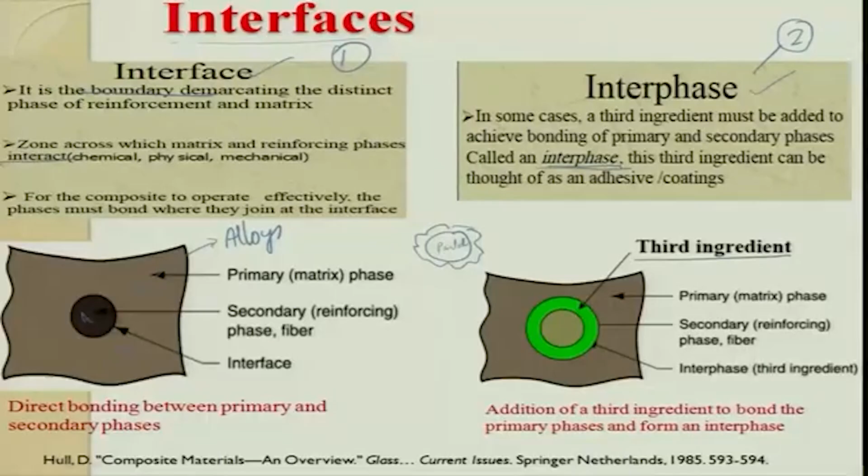The interface bonding can very strongly influence composite strength, modes of failure. I will tell you, if you have a matrix, a reinforcing agent, and if a crack is propagating, this crack strikes the reinforcement, this is the ceramic, and the energy gets distributed over the surface, and it tries to break the interface. So, the crack propagation is stopped. So, the modes of failure are changed; they have a strong influence on the interface.

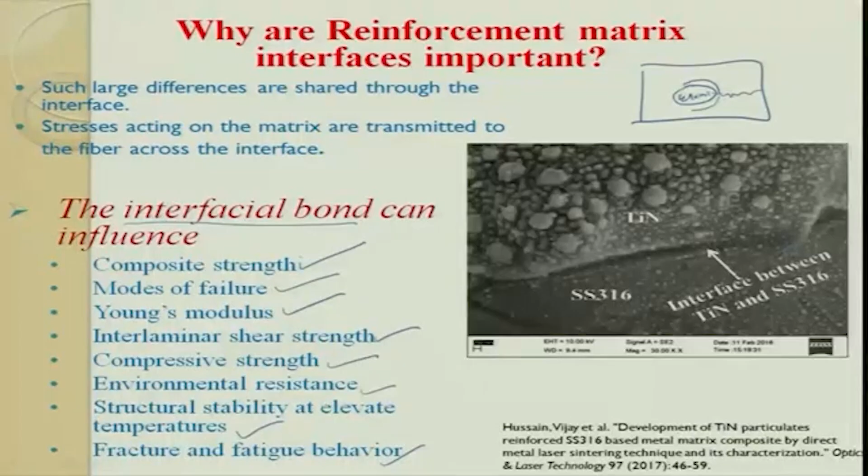Young's modulus, interlaminar shear strength, compressive strength, environmental resistance. If it is open and water can go inside, it starts reacting or corroding and tries to weaken. Structural stability at elevated temperatures also goes down. Fracture and fatigue behavior also falls down drastically if we have a very poor interfacial bonding. So, now it is clear that interface is very, very important.

The next thing which I was talking about again and again, let it be thermoplastic composite, thermoset composite, metal matrix, ceramics, which we will see later, all these things basically depend upon a property called wettability. Wettability means how well the polymer, or the matrix, can spread around the reinforcement. If we have very good wettability, then naturally you will have very good interfacial bonding. If the polymer or the metal does not wet the ceramic, it will try to roll off like this, and you will have very poor wettability.

So, it defines the extent to which a liquid will spread over a solid surface. This is wettability. Wettability in the lotus leaf you would have seen. This idea is mimicked in a lot of engineering applications today to avoid corrosion. In metal matrix composites, they make very small textures on the surface, and then the water droplet does not stick on to the surface. It changes from film condensation to dropwise condensation. It rolls off and there is no corrosion.

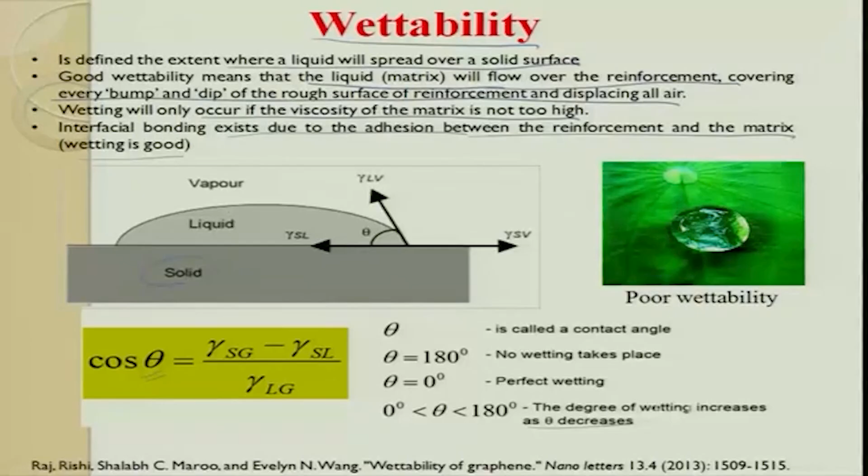So, last class what we saw was different types of liquid state fabrication in making metal matrix composite. This class we will focus predominantly on solid state fabrication. That means I will not change the state; I will use the metal in solid state, and still I would like to make a metal matrix composite. Again, just for repetition, the reinforcement can be in terms of a mat, or particulates, or a lump of particulates joined together to form a given shape.

So, what we do is, we take particulates of maybe ceramic, add some binding agent to it, then consolidate it. We call this a green compact, and then we slightly burn this green compact. So, all the binders we have added get vaporized and evolve out, giving a lot of space for the metal to enter inside when you pour it. Those things are called preforms. So, preforms of ceramics are made, with some voids through which the liquid diffuses inside.

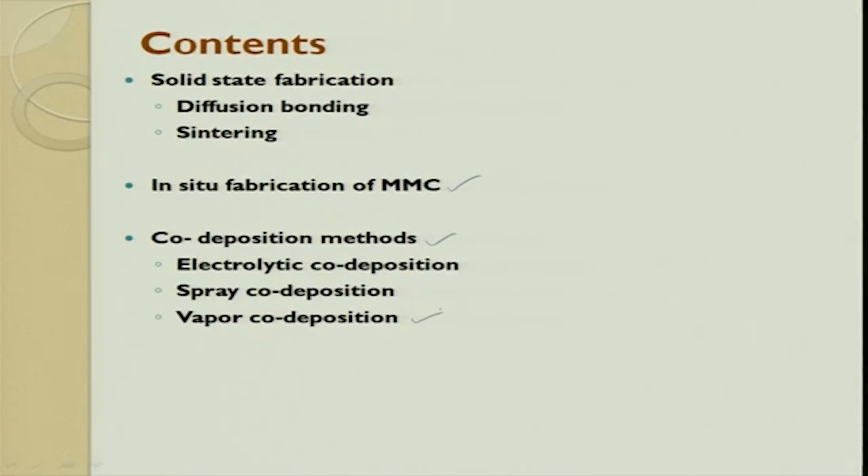So, today we will see solid state, and then we will also see in situ fabrication of MMC. That means when we add two ingredients, it reacts on its own, makes both of them distinct, and it evolves. The other way is the co-deposition method. We would like to talk about electrolytic co-deposition, spray co-deposition, and vapor co-deposition. So, this is what we will cover in this lecture.

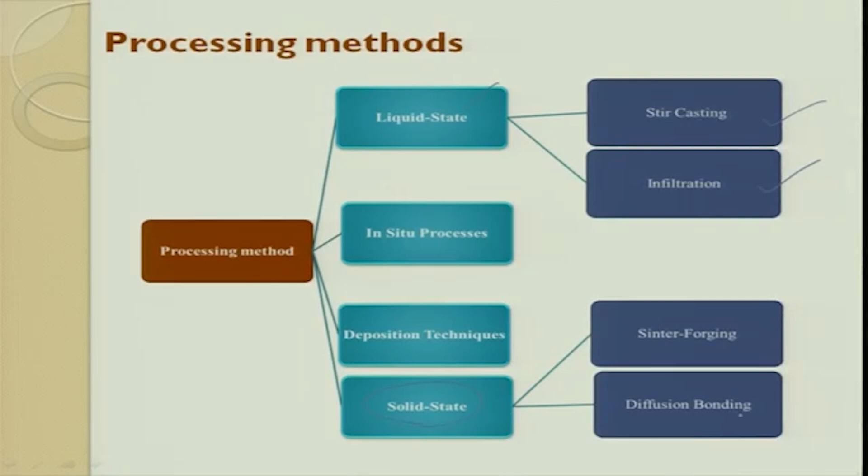So, processing methods: we had liquid state, and last class we covered the stir casting method and infiltration method. Now we will get into solid state, where we will see diffusion bonding and sinter forging. In solid state fabrication, the metal matrix composites are formed as a result of bonding of matrix metal and dispersed phase due to mutual diffusion occurring between them in the solid state at elevated temperatures and pressure. So, this is what happens here.

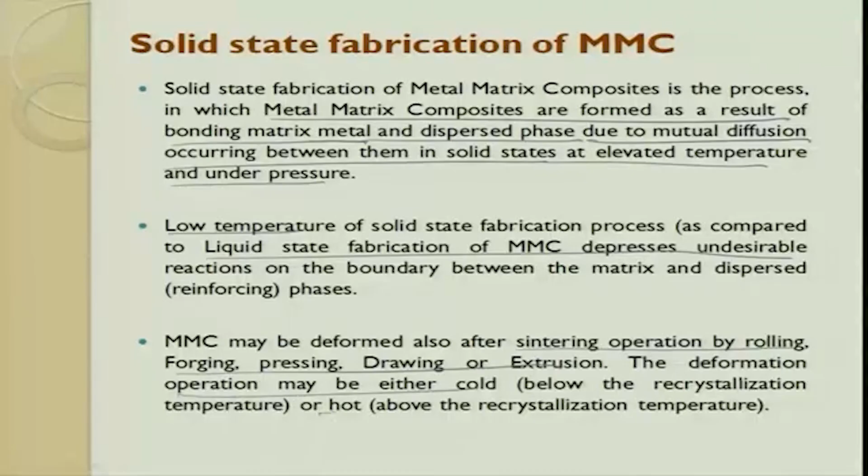What we do is, once we make a crude bulk form, we do a secondary operation to make sure that the composite is formed and the matrix and the reinforcement are uniformly distributed. The deformation operation can either be done cold or hot. So, there are two principal groups of solid state: one is diffusion bonding, another one is sintering.

What is diffusion bonding? Diffusion bonding is a solid state fabrication method in which the matrix is in the form of a foil. So, we take a foil, put some reinforcing agent, then have one more foil, then reinforcement. So, this is a cross section view. So, in diffusion bonding we take a matrix in the form of a foil or a thin sheet, less than 100 microns. And these are the reinforcements.

So, now what you do, you keep a foil, then you keep these long fibers or mat or a preform of ceramic, whatever you have made, you keep it here, and now you try to apply pressure, and then you also try to apply temperature.

What happens if you just apply pressure? Yes, things can happen, but you will still not get a proper consolidation. In order to have a proper consolidation, go back and remember the wettability property. If you want that wetting property, you try to melt this fellow to some extent, and then it tries to take a shape.

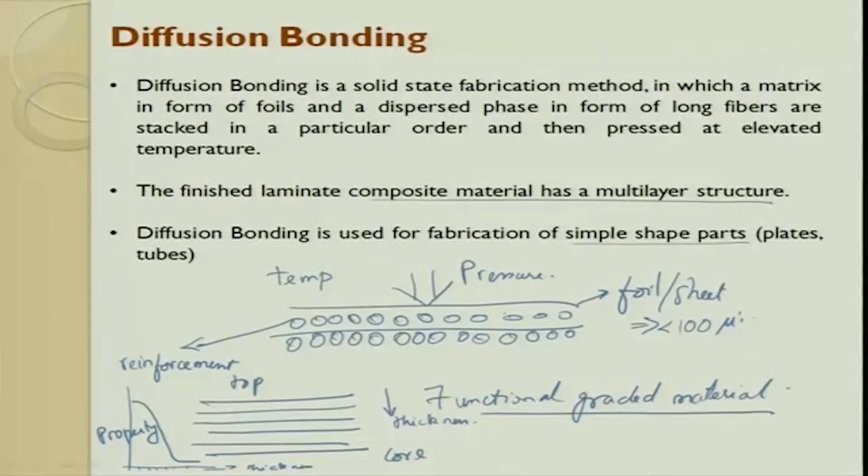For example, you take a rubber tube and you want to have a nipple integrated. In the same way, you can also add the nipple here, and you can have this metal matrix. So, you can make integrated parts using diffusion bonding. So, this is diffusion bonding.

So, this is the die top surface, this is the die bottom surface, and here it is a flat die, and here you see that I have taken several layers. This can be exclusively matrix, this can be matrix with dispersed reinforcement. Again, here you can play with the dispersed reinforcement volume fraction.

For example, you can have 10% volume fraction. As you keep going, you can have 30% volume fraction here, and then on top you have a matrix. So now when you consolidate, you will have a metal matrix composite which is functionally graded. So functional gradation can be brought in while making it.

And why is it very important? Because today when we are talking about multi-sensor applications, multi-sensor integration, we always look for functionally graded materials. So here is a stacking, and you can have your own sequence in stacking to get what you want.

And once you stack, you make a large piece, then you cut to the required size and shape to get the required output. So here the important parameters are temperature, pressure, of course time is also there, and then you can also have volume fraction changing layer by layer.

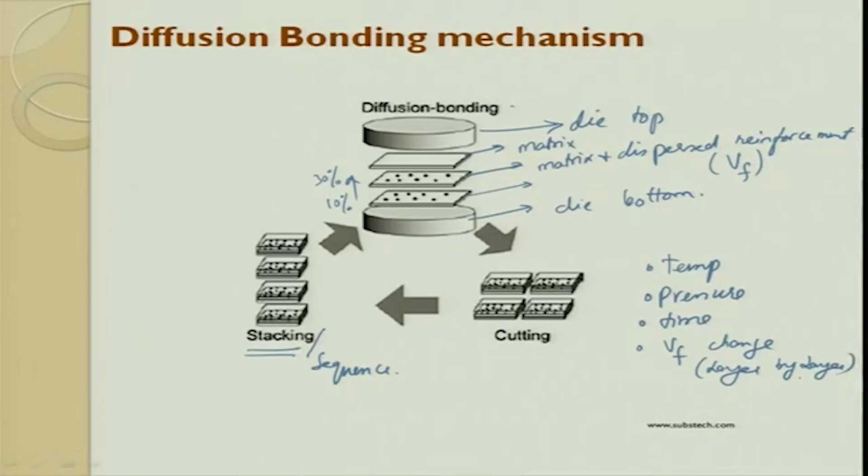But this cannot be done in your stir casting method if you want functionally graded. But there also, if you are very wise, you can do it. You start dispersing higher density ceramic first, then lower density ceramic. So you can still have a functionally graded metal matrix composite, provided you think a little. So this is how it happens.

These are all the fibers. You can have fibers made out of metal, you can have fibers made out of ceramic, and then get whatever you want. Okay. So fibers can be organized in some pattern, or they can be random in nature also.

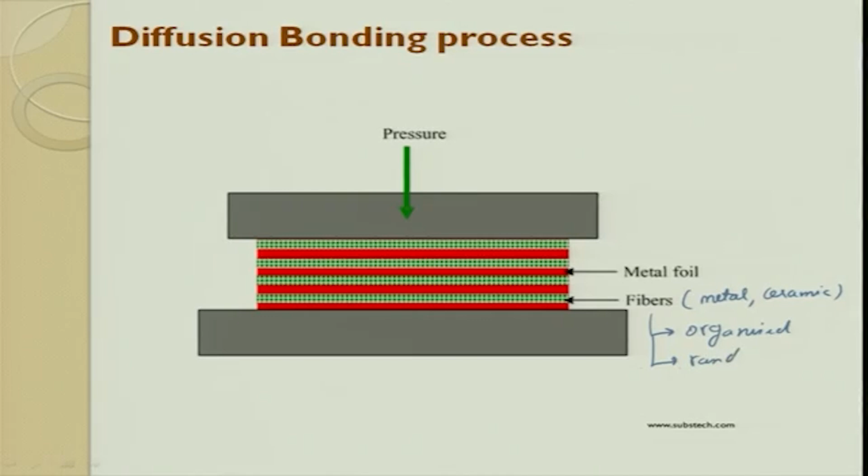So the next bonding process is called sintering. Sintering is a process wherein you start with metal powders, or any powder, metal powder or ceramic powder, and you try to consolidate them. Let us assume you consolidate only by pressing; then all these particulates, whatever powder was there, get consolidated.

Now when it gets consolidated, you see there is a small space getting formed, and you want to still close this space. How can you close it? One, you can push in something there to close it, or you apply temperature. When you apply temperature, the consolidation happens in a big way. So if you have a ceramic material which is of very high temperature, naturally we try to go for an interface. We try to give a coating and then try to join it. If not, you have to think of a very high pressure, very high temperature, and then do it.

If I don't want to apply temperature, naturally our pressures go extremely high. That is why people do hot press, cold press, hydrostatic pressing; all these things are tried. If you can do both, that is good. If you have only one parameter because of some constraints in the material, then the pressures have to go phenomenally high or temperatures have to go phenomenally high. So you have to think of an equipment for it.

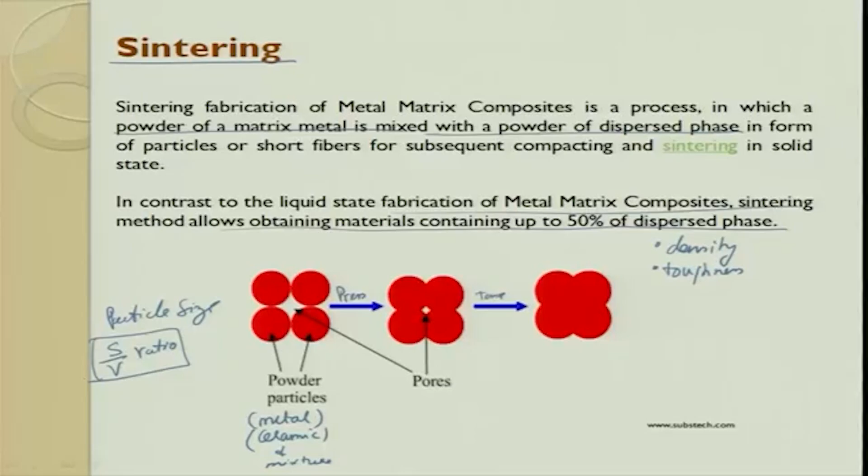Where we were struggling to get 30%, 40% in the stir casting method, saying 50% can be done, here in sintering you can easily go from 50% to 70% depending upon your requirements. When you do it, the particle size is also very important, because particle size in turn influences the surface area. The surface to volume ratio, which I have been repeatedly mentioning, plays a very important role. So particle size and volume are very important to get the best out of it.

The primary driving force for sintering is not the fusion of material. If you look at this figure, there is surface diffusion happening, evaporation condensation happening, then grain boundary diffusion happening. Here is volume diffusion, this is the grain boundary, and this is plastic flow. All these phenomena happen during sintering. Volume diffusion, grain boundary diffusion, and plastic flow are the three major things involved in sintering.

Around the surface you have surface diffusion, you will also have the grain boundary getting formed, and evaporation condensation also happening. But these three are very important. Please make a note: volume diffusion, plastic flow, and the third one is grain boundary diffusion. All three phenomena together happen in the sintering process.

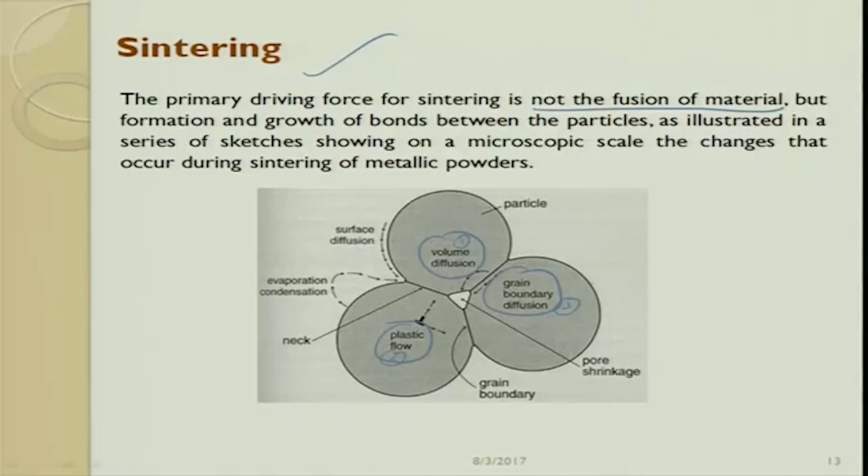If all these things are metal, the mechanism is going to be easy. But if you have one particle as ceramic and the other two as metal, then the strategy has to be different.

These are the different stages in which the grain boundary grows. First, point bonding happens, then this point tries to grow and becomes a neck. As this neck grows, the pores shrink, and further, a grain boundary gets formed along the particle grain size, so the pore size becomes much smaller.

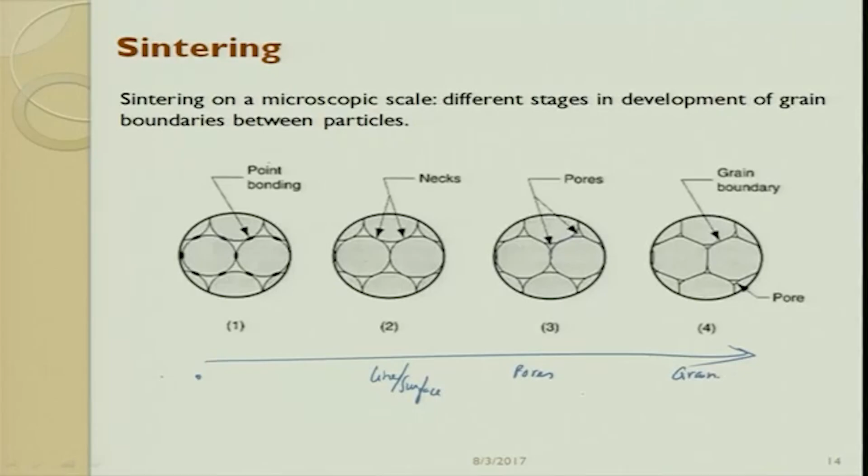Generally these are the four stages involved in the sintering process. First, point bonding happens. The point becomes a line, then slowly a surface, then more pores form. These pores are reduced, and then you get a grain. So these are the four stages generally involved in the sintering process.

As I told you earlier, if you want to do a sintering process, you cannot directly ramp up to higher temperature. We divide it into three stages. The first stage is preheating, which takes the material to a certain temperature, slightly less than the melting point, and maintains it there.

During preheating, water molecules, any air, and any volatile oil present in the ceramic particle, metal powder, or the die all get evaporated and cleaned out. This way, you try to maintain a uniform heat distribution.

Once the preheating stage is over, we start the sintering stage. Here, we ramp up the temperature with respect to time, but not instantaneously—it's done slowly. We take it to a higher temperature and maintain it for some time.

Then we switch off the furnace and allow furnace cooling all along, so that the product made does not develop any cracks induced by thermal stresses. This is what we try to maintain.

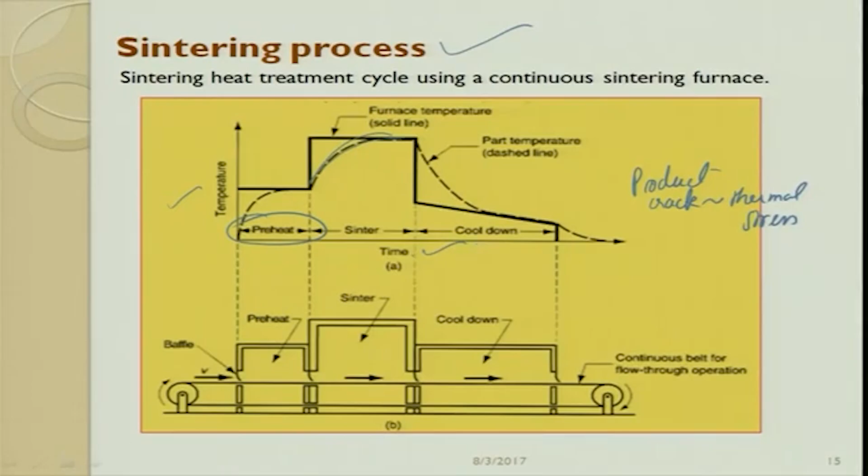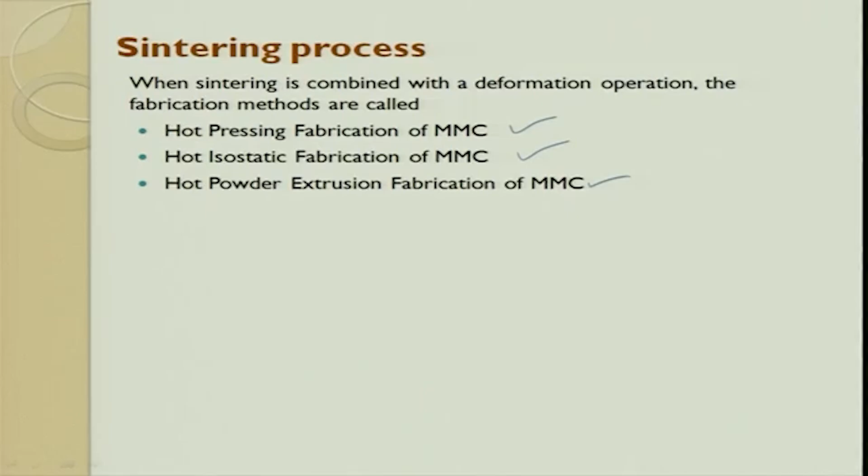Sintering can be done by hot pressing, hot isostatic pressing, or hot powder extrusion fabrication of MMC. Hot pressing means pressing from only two directions, while isostatic means applying uniform pressure all along to get a sound output. These are the three processes done under sintering for metal matrix composite making.

In hot pressing, we take a metal powder and a reinforcing powder, mix them properly, put the mixture in a die, and compact it. Then we apply hot pressure—heat and pressure are applied together—and finally we get the output. This process is called hot pressing.

Here the pressing happens only in two directions, and since this is a die, it is a confined portion. So here we do not apply pressure; we make sure it is a confined volume, so we get a uniform strength distribution all along.

If you do not do proper mixing, you might have cracks inside which are very difficult to visualize. I am talking about not the surface, but cracks inside. This will lead to poor quality output.

Next is hot isostatic pressing. Whatever was the deficit there, for example if in certain directions there is no pressure applied, compaction may not be proper at those places. To avoid this and get the best output, we do hot isostatic pressing. The powder along with the mixture is put inside a die, which can be a flexible die. We put it inside and apply hot air or very high pressure around it, so proper consolidation happens and you get the required quality output. Proper consolidation is very important here.

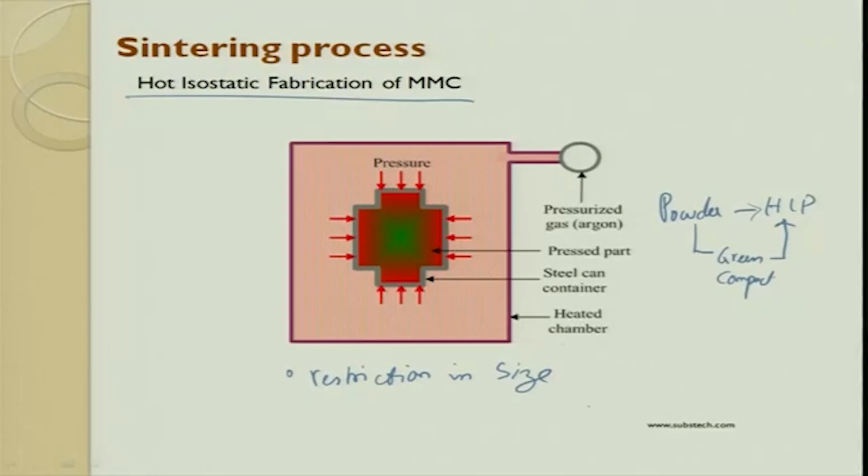So here what is the biggest problem? The biggest problem is the restriction in size. Can I make a piston out of it? No, it is not possible. Can I make a pin out of it? Maybe possible. So that is the problem.

In sintering also, if you want to make something like an insert made out of metal matrix composite, it is possible. If you want to make a big hollow component, it is slightly difficult. Heavy, meaning large hollow components, is difficult.

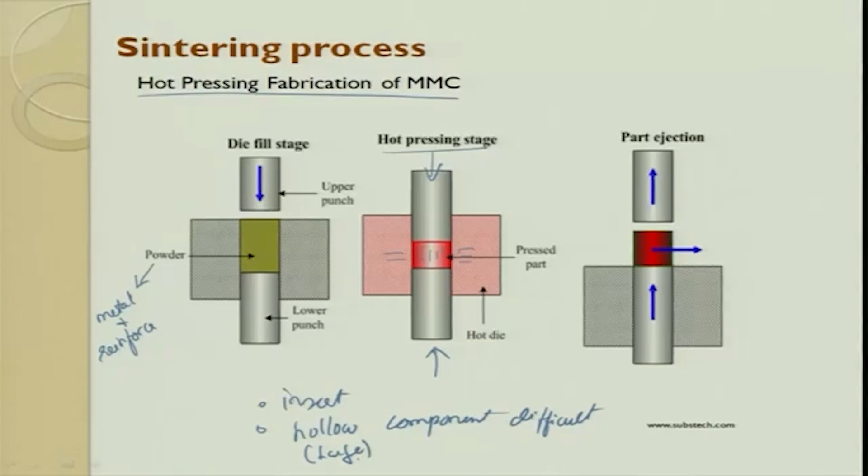Next is hot powder extrusion. Here we mix the metal particulate together, then apply pressure and heat, with the pressure given through a ram. We do an extrusion process through this - you can do direct extrusion or indirect extrusion. So we get hot powder extrusion fabrication of metal matrix composites.

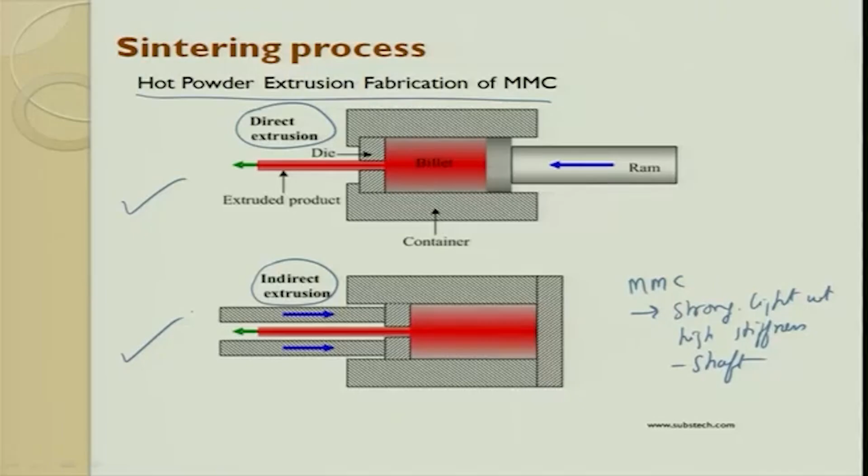So with MMC, if you want to make a strong, lightweight, high stiffness shaft, it is possible - these are the processes used for making such outputs. There is a lot more if you take every process; we are just quickly browsing through them. Each process has a fishbone diagram and several parameters, which have to be properly understood before we can execute it to get good quality output.

The next topic is in situ fabrication. As I told earlier, in situ fabrication means I add both powders and there is a reaction which happens, or I apply heat from outside, so the reinforcing phase and the matrix get evolved at the same time.

In situ fabrication of metal matrix composite is a process wherein the dispersed phase in the matrix results as a precipitate from the melt during its cooling and solidification process. I repeat: the dispersed phase is formed in the matrix as a result of precipitation from the melt during cooling and solidification.

There are different types of metal matrix composites prepared by in situ processes: particulate in situ MMC, short fiber reinforced in situ MMC, and long fiber reinforced MMC. Particulates can be alumina, SiC, TiCN, TiB2, TiN, whatever you choose. In particulate composite reinforcement, by in situ synthesis, the dispersed phase is in the form of particles, as shown in the examples.

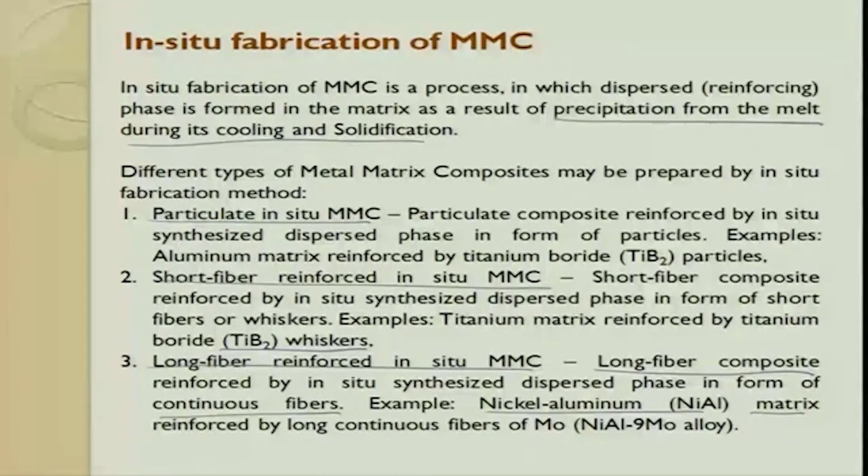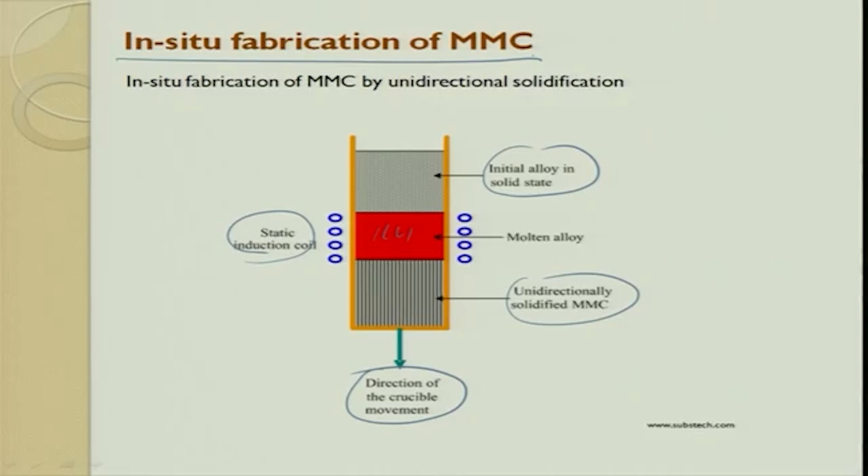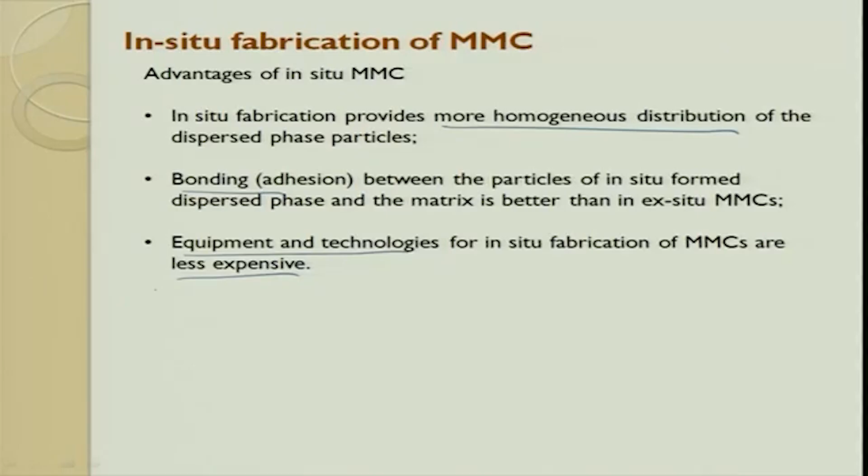The major advantage is that you can provide more homogeneous distribution compared to other methods. The bonding is very good, and the equipment involved is not as expensive as hot pressing, so it is slightly economical. But the biggest problem is that not everything can be done through this in situ fabrication method, because of material limitations.

So the disadvantages are that the dispersion phase is limited by the thermodynamic ability of its precipitation in a particular matrix, and the size of the dispersed particles is determined by the solidification condition. So these two things I do not have control over - this is by my choice, and not many materials give me this thermodynamic ability. The second thing is the particle phase - I cannot decide what particle phase gets formed, it evolves, so I have to live with what is getting generated.

So with this I would like to finish the lecture on metal matrix composites solid state fabrication. I would like to continue with co-precipitation in the next class.

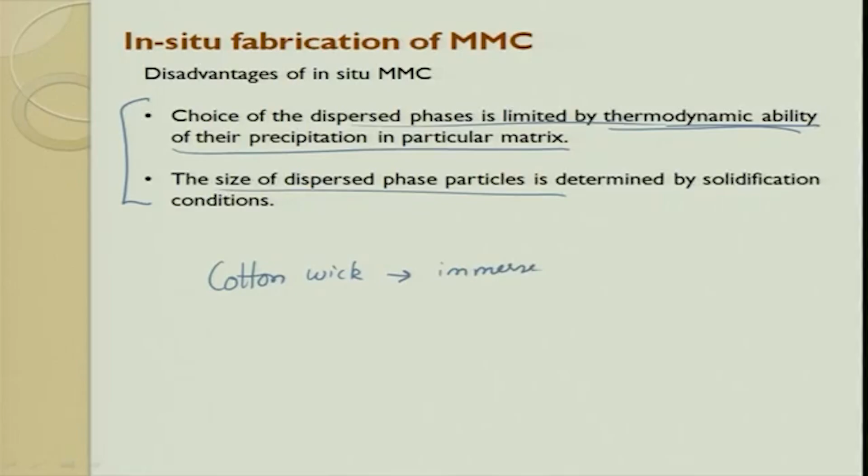So I would like to give you a small assignment. Take a wick or a cotton wick, and immerse it in oil or whatever media you want - it will be good if you do it in a colored media. Then you plot it - put it inside a bottle or a tank, and put this wick inside. This is a liquid, and this is the wick. The wick will slowly start to draw the liquid by its capillary action - you can see the color of the oil or water or media going higher. So now kindly plot it with respect to time, the height which is going up.

Take two different types of oil. What is this going to tell you? This will tell you what the influence of capillary action is - how the wick sucks this liquid and gets it inside. Take two different types of oil, and also try three different temperatures. Please plot it. For example, this can be at 30 degrees, this can be 50 degrees, this can be 90 degrees, whatever it is, and this can be oil type A, and this can be type B.

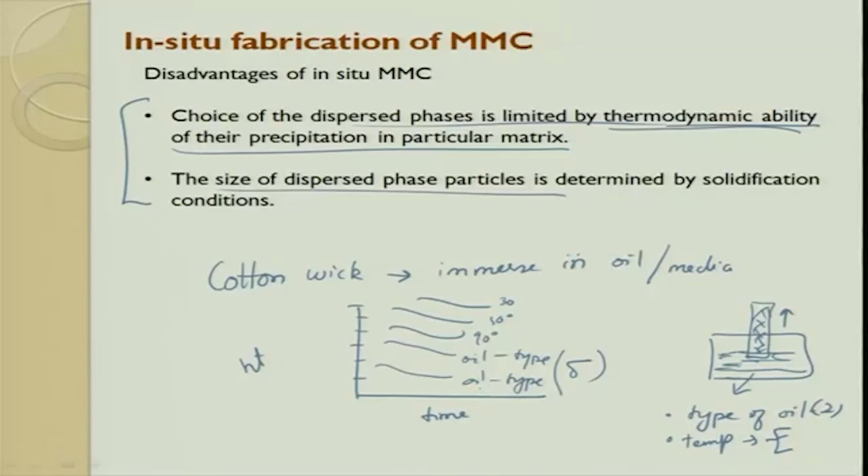So what are we trying to do in this entire small experiment? We are trying to see the influence of temperature on capillary action - that is point number one. Point two is varying the media, varying the oil. This is what I am trying to link with metal matrix composites - varying density. With this you will try to realize the influence of capillary action on the formation of a metal matrix composite. Then, suppose you want to accelerate and reduce the time to a large extent, if you want to change the viscosity to a very high viscosity, what will you do? That is what you have to think about and then do.